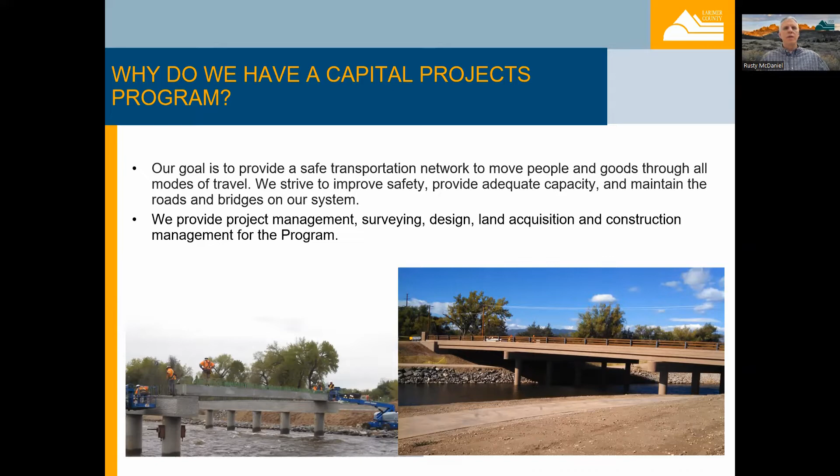The goal of our CIP is relatively simple. We want to provide a safe yet mobile transportation network for all users, including cars, bikes, pedestrians, and other modes of transportation. Our group provides the project management, surveying, design, land acquisition, and construction management for the projects. In choosing projects, we focus on three main areas: safety, capacity, and maintenance.

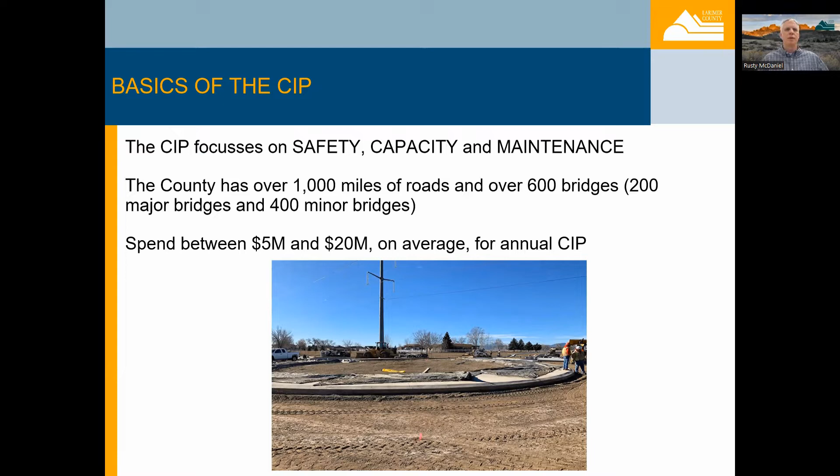We have around $3 million a year for capital projects and another $4 million for the annual overlay project. So depending on grants and other factors, we typically spend somewhere between $5 and $20 million on projects each year. This doesn't go very far when you consider we have over 1,000 miles of roads and 600 bridges to manage.

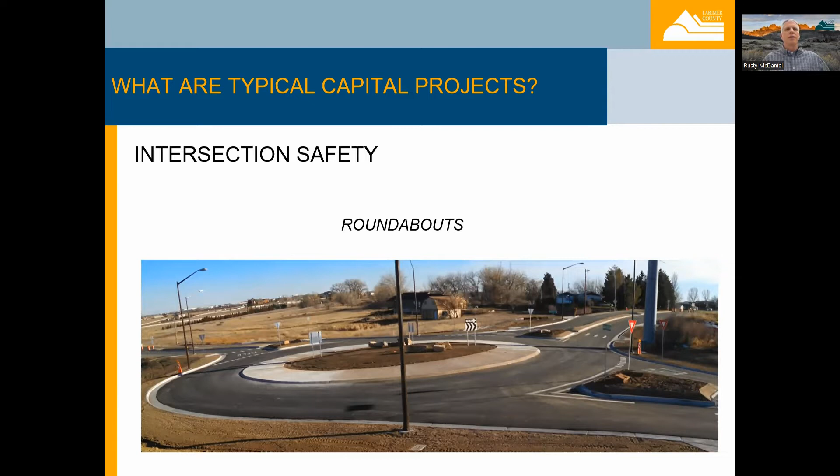Here are a few examples of our projects. Intersection safety is always a high priority, and roundabouts are a great way to improve safety. To date, we've constructed 6 roundabouts, with 2 more slated for 2023. Signals and turn lanes are also common intersection improvements. Here are 2 signals we've constructed recently.

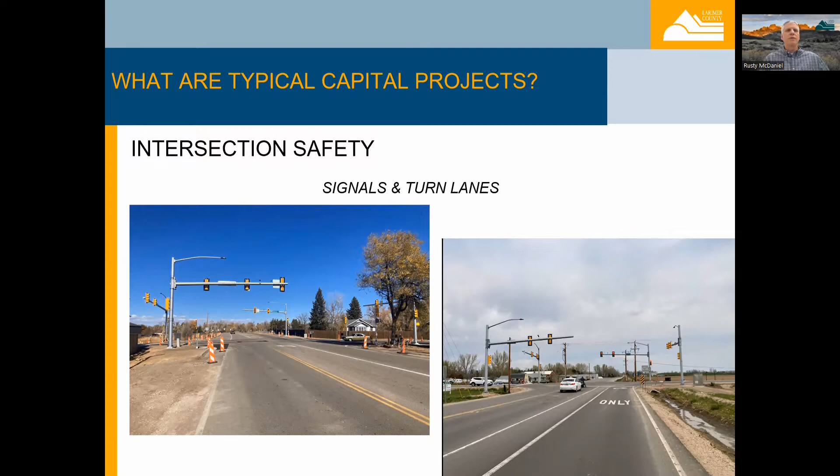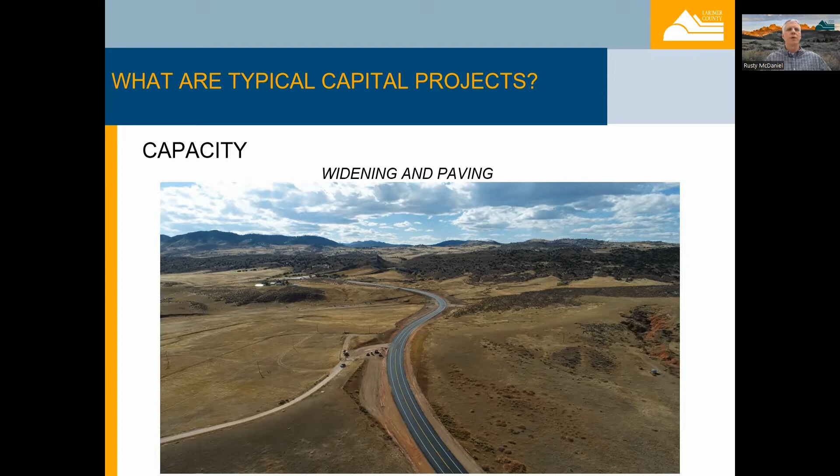In this example, a 3-mile stretch of County Road 72, which is part of the Owl Canyon corridor, was turned from a gravel road to a paved road in 2021, which greatly increases its capacity.

This example of a bridge is one that we recently replaced on the Namaqua Road over the Big Thompson River. Prior to the project, it was a narrow 2-lane bridge. Now the new bridge provides sidewalks as well as on-street bike lanes.

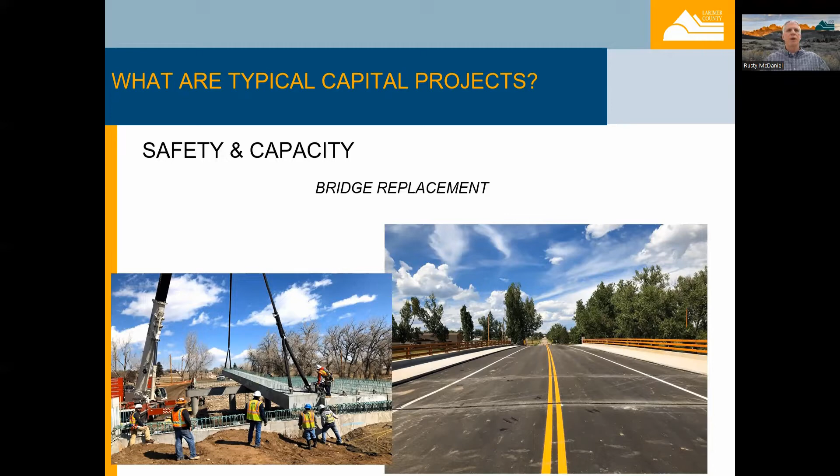It takes a real team effort to choose which projects we should work on. We work closely with our transportation operations group, our bridge program manager, the development review group, our floodplain manager, and our road and bridge department to make our selections.

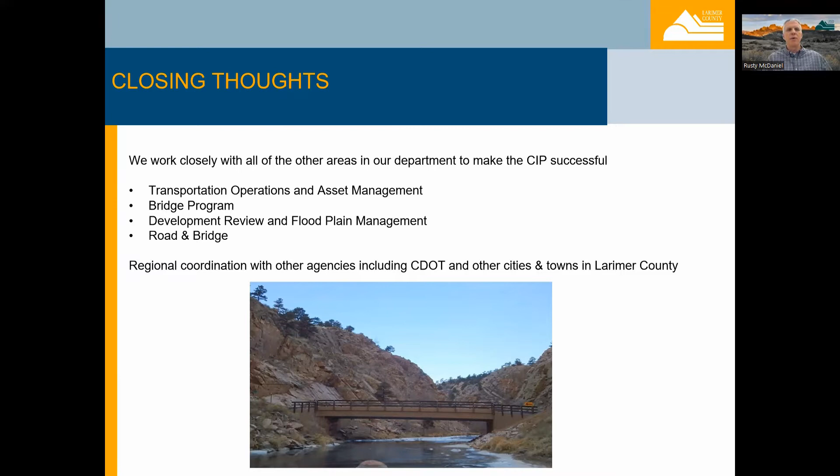And finally, in order to have a successful CIP, we need to work closely with other agencies. CDOT, or the Colorado Department of Transportation, oversees all the projects that we receive federal or state grants for. We also coordinate and sometimes even partner with cities and towns in the county, as well as our neighboring counties, to build projects that will benefit us both.

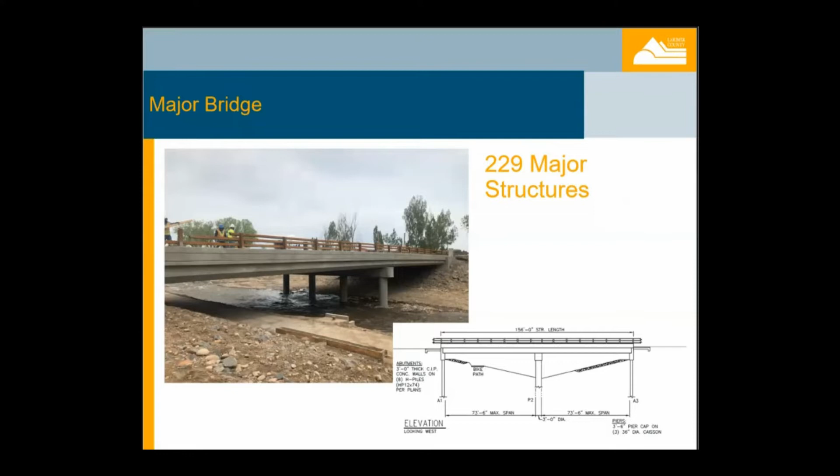Larimer County has three categories of bridges: major, minor, and culverts. A major bridge has a clear span opening greater than 20 feet measured perpendicular to the waterway along the center line of the road. The average age of a Larimer County major bridge is almost 40 years old. The average cost to build a smaller major bridge is about $1.5 million, while some larger capital projects incorporate bridges greater than $3 million.

A minor bridge is any structure between 4 foot and 20 foot in clear span. These can be concrete or steel pipes, concrete box culverts, or small bridges, for example. Larimer County currently has 485 minor bridges, and the average age of a minor bridge is almost 50 years old.

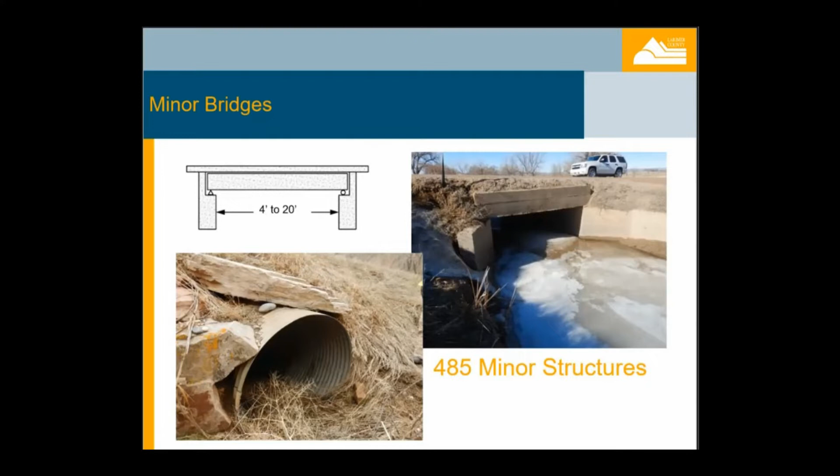Any structure under 4 foot in diameter is captured under our culverts inventory, and there are over 4,400 cross roadway pipes in unincorporated Larimer County.

All major bridges in Larimer County are required to be inspected every 2 years. The information collected during the inspection is reported to the state and National Bridge Inventory. Though the average age of a bridge in Larimer County is over 40 years, the overall average condition of our bridges is actually slightly above the state average.

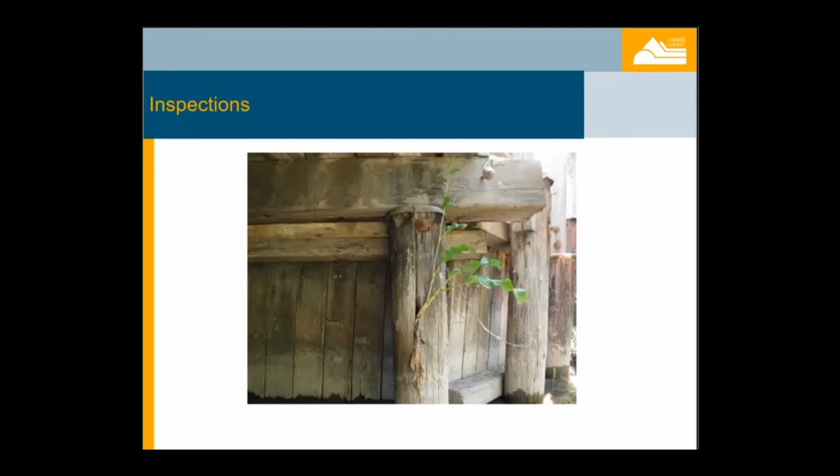In the case of significant or rapid deterioration of a part of a bridge that warrants our immediate attention, inspectors will notify us in a letter called an essential repair letter. This is an example of a timber bridge where one of the timber piles is core rotted and plants are now growing out of it. Though we might consider this a creative installation of hydroponics, we work hard to monitor and correct elements before they become a bigger issue.

Not all repairs are as extreme as the timber pile example. The purpose of repairing or rehabilitating a bridge is to extend the bridge's serviceable life. The more proactive we are in maintaining and repairing our existing inventory, the longer a bridge can stay in service. Larimer County Engineering works with Road and Bridge to program maintenance and repairs of bridges and culverts.

Here's an example of a concrete deck repair. This bridge didn't have any asphalt along the curbs, and after many years of water working its way into the concrete, we identified spalls on the deck. The spalls were chipped out, the steel reinforcement and exposed concrete was sealed and treated, and then the bridge deck was patched. Finally, we paved all the way to the curbs and placed this bridge on a routine deck sweeping program to keep debris from accumulating at the curbs.

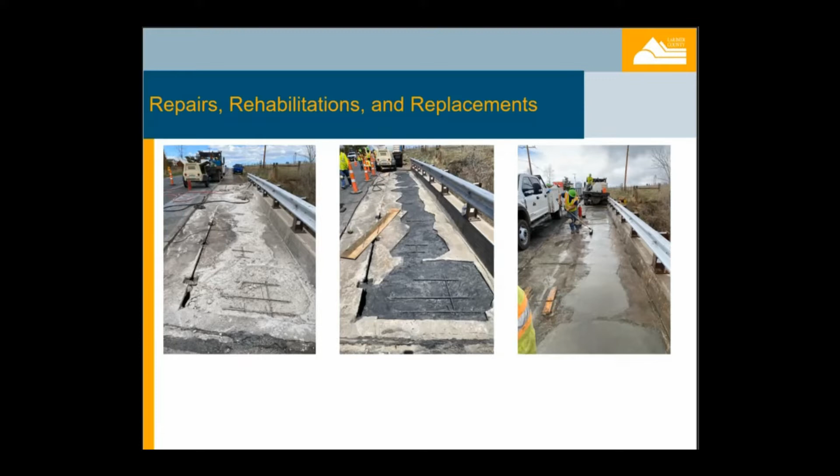Using repair methods like this helps us stretch county taxpayer dollars further and is a great example of adding many more years to the serviceable life of a bridge instead of just replacing them altogether. There are so many parts and pieces to managing Larimer County's bridge program. I hope this has provided you with a quick insight into what we do. Thank you for your time.

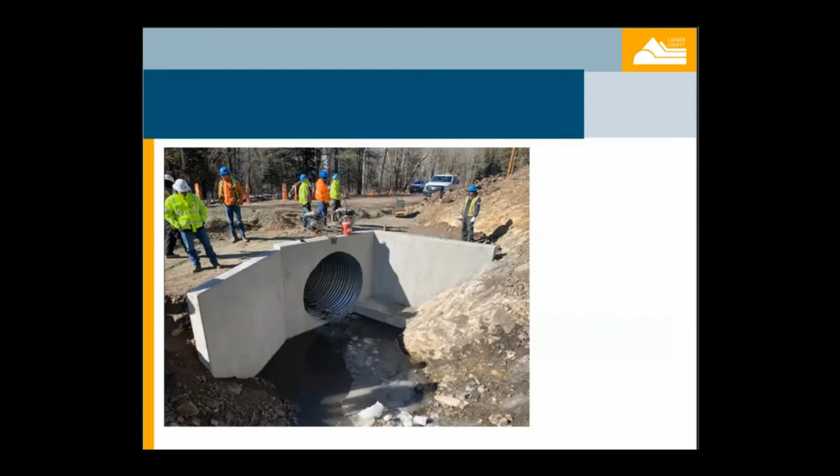Hi there, my name is Matt Johnson, and I'm a project manager for the Larimer County Engineering Department. I'd like to take a few minutes to describe some of the work we do within the department and for the county. Unfortunately, our county has had several major natural disasters to contend with since 2012.

During the summer of 2012, the High Park wildfire burned approximately 90,000 acres in the foothills west of Fort Collins. Significant flooding issues resulted within the burn area afterwards. The engineering department managed multiple mitigation efforts following the fire, such as aerial mulching, replacement and upsizing of stream crossings, such as in Rist Canyon, structure protection, and rock armoring of roadway embankments and slope stabilization projects.

While the county was still in recovery mode from the High Park fire, one year later, significant flooding occurred in September 2013 throughout numerous mountain streams and river corridors. Widespread destruction happened along rivers such as the Big Thompson, Little Thompson, Fish Creek, and Buckhorn Creek. Communities such as Glen Haven, Pinewood Springs, and many others were cut off until roads could be temporarily rebuilt.

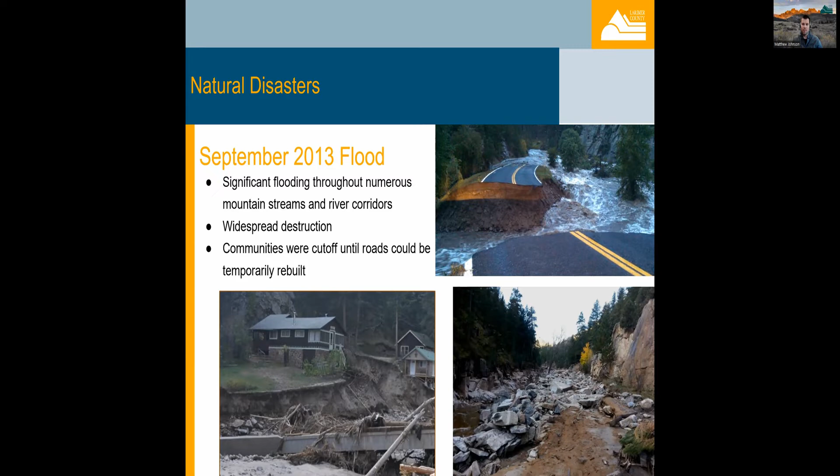The engineering department managed many of the roadway and bridge reconstruction projects in the years following the 2013 flooding. In fact, we are close to completing the final project this summer in 2022, nine years after the event. The county sought public assistance from multiple state and federal agencies to help provide project funding.

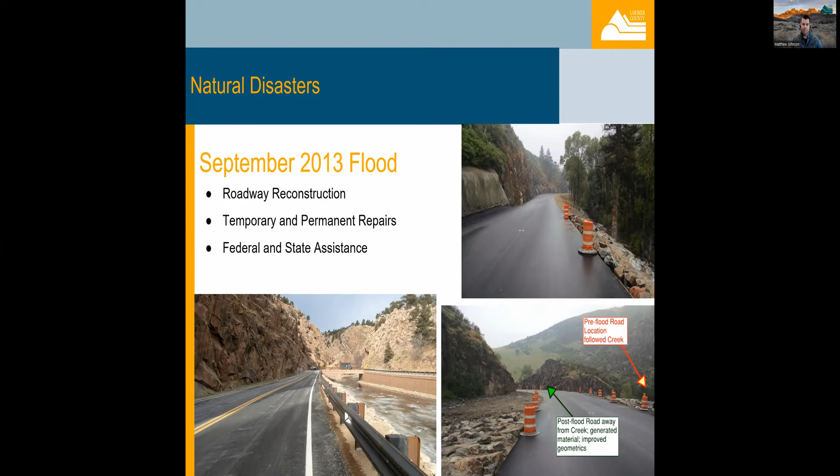Then, in 2020, the Cameron Peak wildfire, the largest in state history, burned approximately 209,000 acres in the western mountains of Larimer County. Similar to the aftermath of the High Park fire, we saw flooding and debris flows caused by relatively routine thunderstorms within various drainages in the Cameron Peak fire burn area.

The engineering department again partnered with state and federal agencies to fund and manage mitigation and recovery projects consisting of road rebuilding in the streamside area of Glen Haven, structure protection, and culvert repairs in the upper Buckhorn, as well as other locations throughout the burn area.

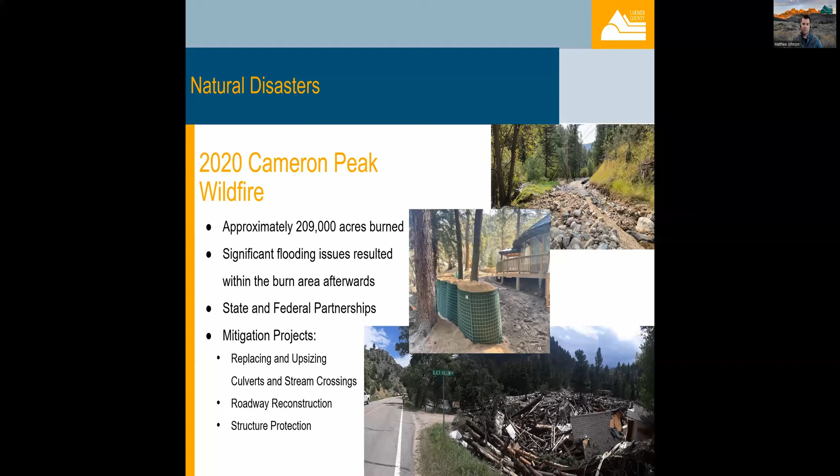I hope this video provides a window into the important and rewarding disaster mitigation and recovery work that the engineering department continues to provide. Thank you for watching.

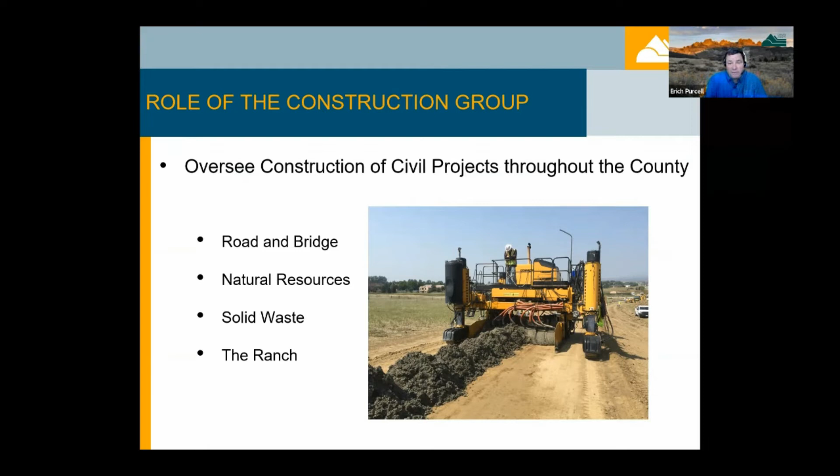After a project has a set of plans and a contractor has been awarded, our group oversees construction in the field. We construct projects for many departments, including road and bridge, natural resources, the landfill, and the fairgrounds. Our group is in the field during construction, orchestrating all the moving parts to deliver projects of the highest quality and with the best value to Larimer County.

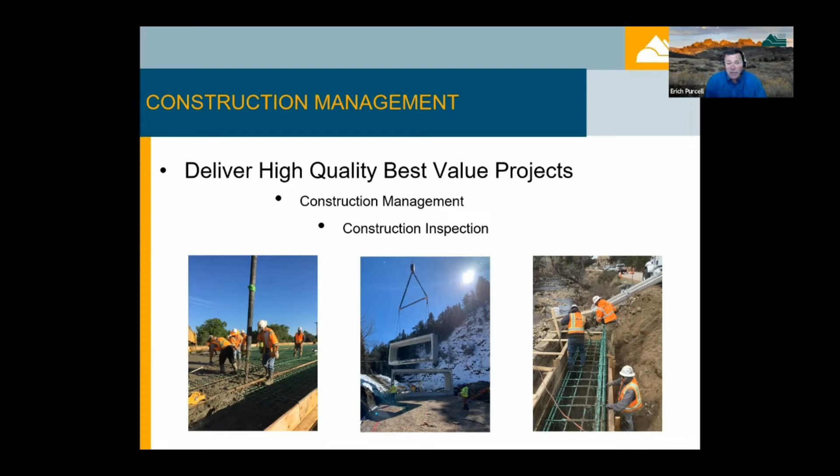Our group is divided into construction managers and construction inspectors. Construction managers oversee the entirety of construction operations. They're focused on the schedule, safety, and contractual details of the project. Our CMs are the hub of communication, ensuring engineering staff, the contractor, and the public are informed and aware at every stage of the project.

This communication keeps the project on schedule, informs the public of potential impacts, and keeps the contractor informed of any design changes. CMs look forward for possible issues meeting deadlines and work with the contractor to complete the work on time, thereby minimizing delays to the public and costs to the county.

Even the best set of plans runs into unforeseen conditions in the field. Our CMs coordinate with their contractors and design staff to develop the most cost-effective and timely solutions to keep the project on schedule and the design intent met.

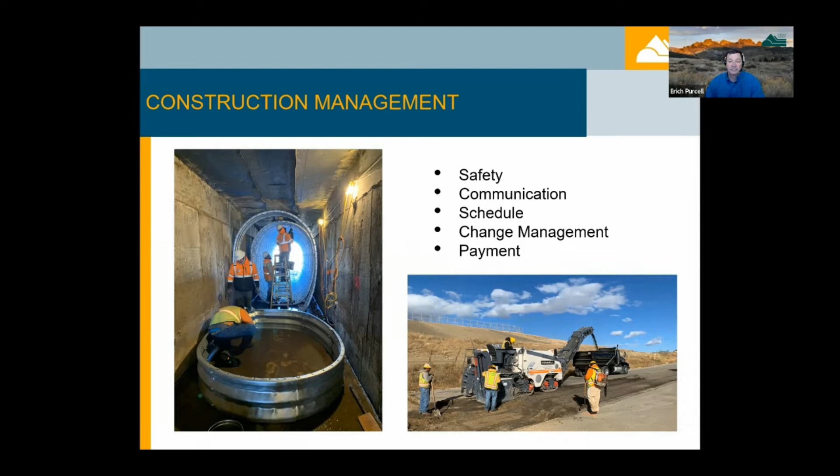Our construction inspectors are boots on the ground. They are on the job site daily, working side by side with the operators and laborers, inspecting for conformance with the plans and specifications. They schedule and review material testing to make sure the end product meets our requirements.

They also keep daily logs of the work performed, so the contractor is paid promptly and the county is only paying for work performed. As the person working closest to the construction, the inspector is also our first line of defense in keeping the job site safe.

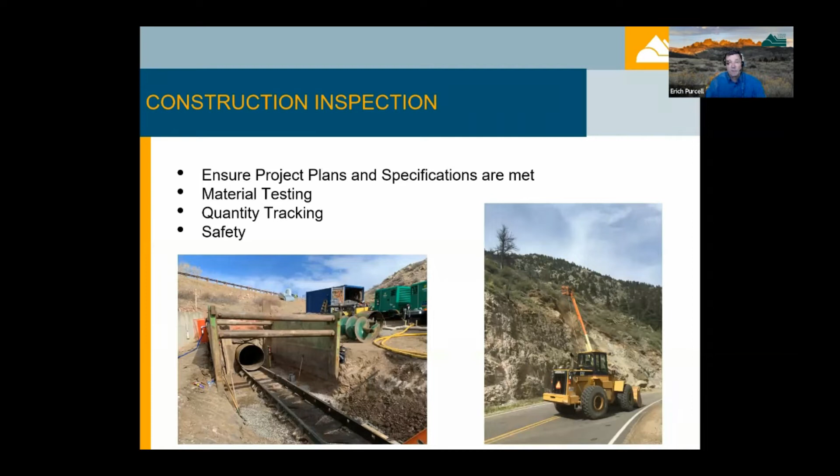As well as construction specifically for Larimer County, our group oversees construction by others within our right-of-way. We issue permits for utility construction with specific requirements and perform inspections so we can ensure our roadways, as well as other utilities, are not negatively impacted by their work.

For new access to county roads, we use the permit process to ensure new subdivision roads or driveways meet our design standards and are constructed to our quality specifications.

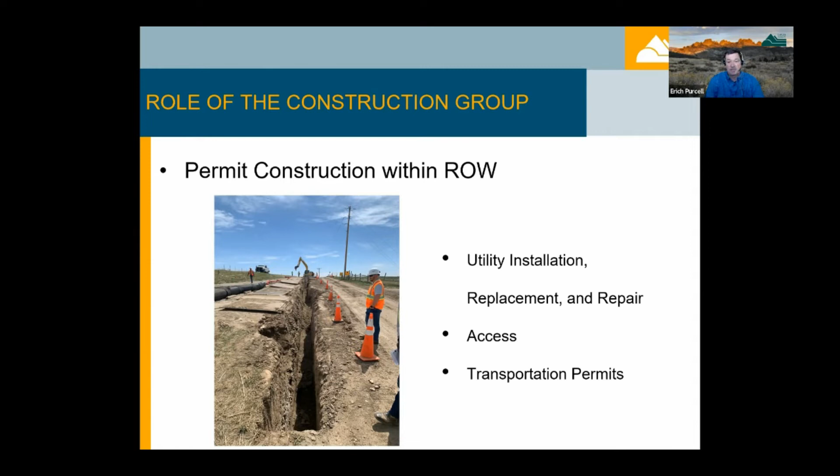Lastly, while not construction, our group also permits special transportation, be it oversized or overweight loads. This allows us to dictate routes that avoid our weight-restricted bridges and minimizes impact to the roadway and traveling public.

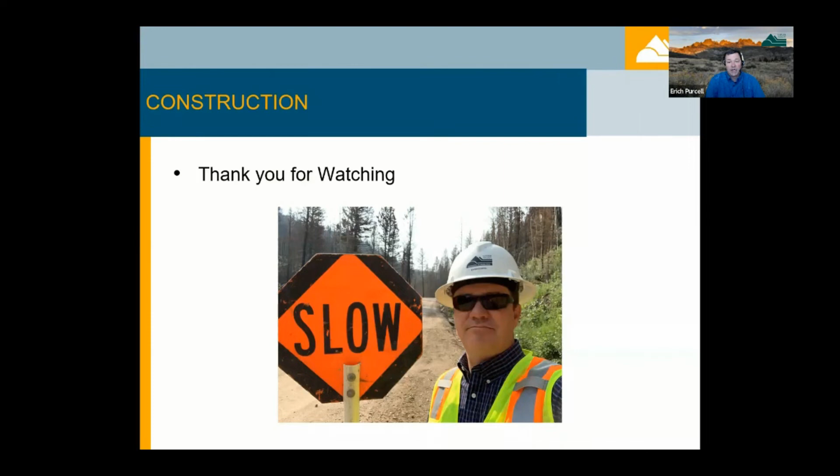There are many more aspects of construction management, but I hope this has provided you with a brief introduction into our role in delivering the roads you drive on, the parks you play in, and the services Larimer County provides. Thank you for your time.

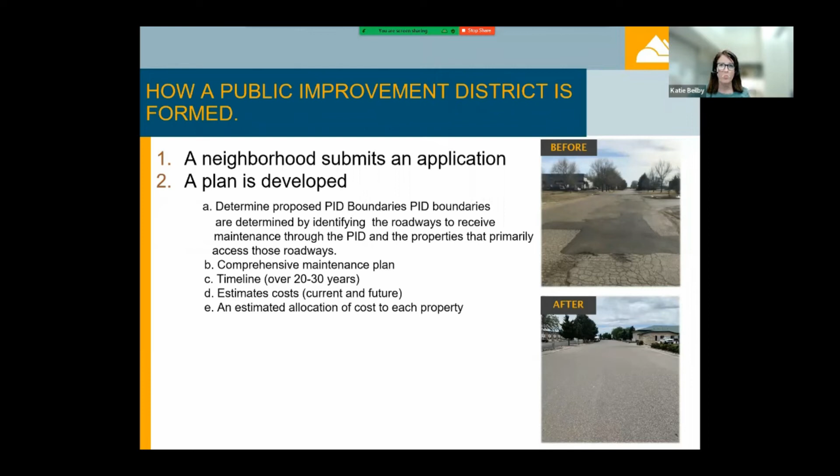If approved, the Board of County Commissioners will appoint members to an advisory board. This advisory board will act as a conduit of information between the neighbors and county staff. All funds collected will then go into an interest-bearing account where staff and the advisory board will begin budgeting for upcoming projects. Annually, the board will hold an owners meeting where neighbors can come and address the board with any issues or concerns they have within their district.

The board will then work with the county on how to allocate their funds. The board will also have the ability to adjust the mill levy rate as long as it never goes above the voter-approved amount.

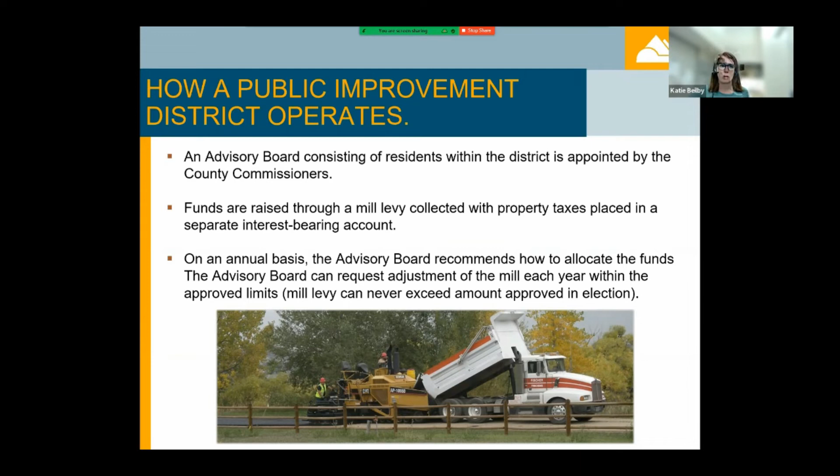Currently, the county has 65 PIDs that encompass over 5,500 properties and 130 miles of road maintenance. Collectively, the PIDs average a revenue of over $3 million a year.

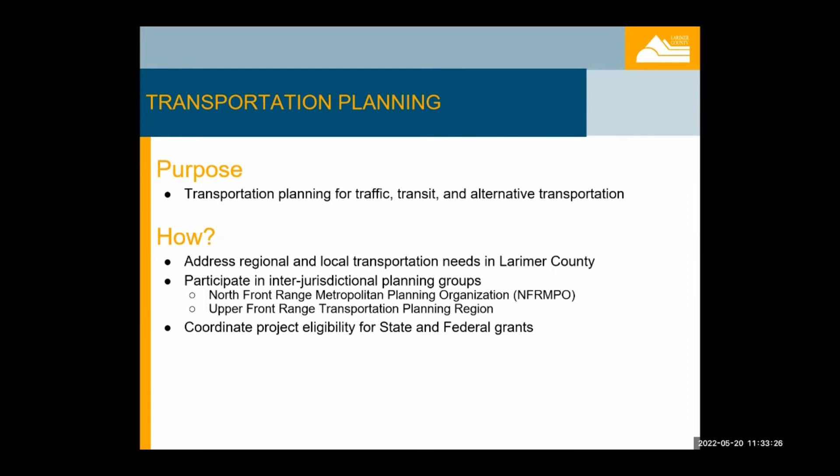Traffic is focused primarily on the operational aspects of traffic in unincorporated Larimer County. Community members are important in helping identify emergent traffic issues. These issues frequently require studies be performed to assess, identify, and prioritize improvements.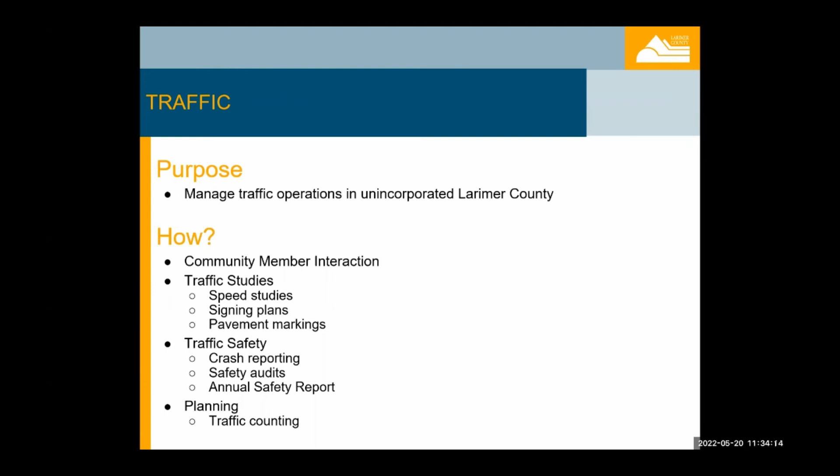Improving traffic safety is a key factor in managing traffic operations. We track crashes on our road system, perform safety audits for high frequency or severe crash locations, and prepare an annual safety report, which helps highlight issues, planned improvements, and performance of past safety projects. Planning for future traffic requires a robust traffic counting program to identify traffic volumes and historic traffic growth trends.

Asset management aims to take care of roadway assets in an efficient and effective manner. Asset management starts with having a comprehensive inventory of roadway assets and their locations. Assets might be physical, such as bridges, roads, signs, and culverts, as well as non-physical items, such as traffic crashes, speed limits, and traffic volumes.

Many of the physical assets are inspected to track their conditions and identify maintenance needs. Assets which receive appropriate maintenance will last longer at a lower total cost than if they are simply replaced when they wear out. Asset management provides the data necessary to help in planning and budgeting to maintain our physical assets.

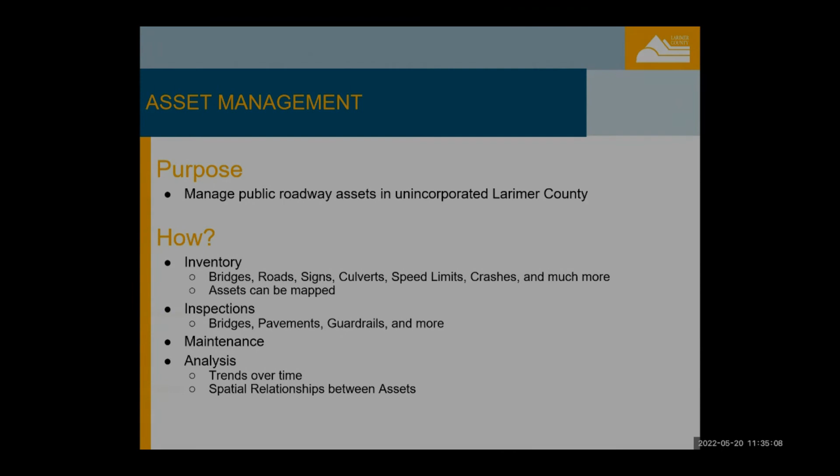Thank you. The Development Review, Floodplain, Stormwater, and Environmental Services team has a wide range of job responsibilities, including performing development review, ensuring environmental compliance, and managing the county's floodplain, stormwater, and MS4 programs. In the following slides, we will share what these services mean.

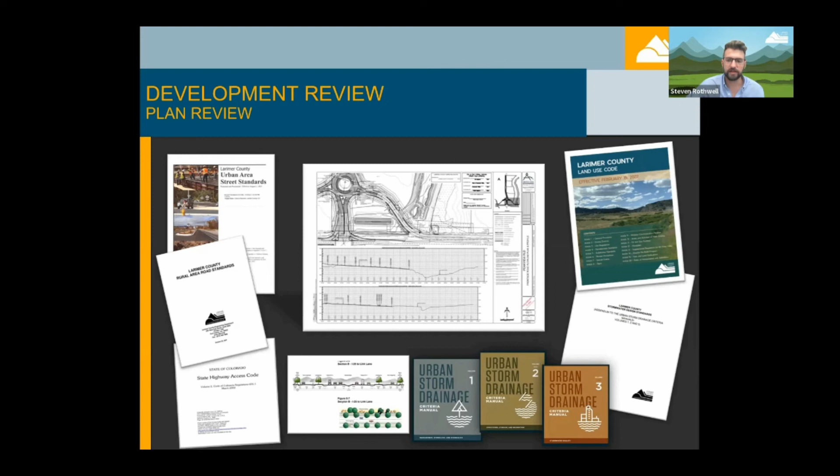As Larimer County continues to develop, our engineering development review team is tasked with ensuring that new development infrastructure is planned, designed, and constructed in a manner that both minimizes impacts to our citizens and environment and safeguards public infrastructure into the future. This involves reviewing development applications for compliance with various engineering-specific local, state, and federal codes, standards, and regulations. The team also works cooperatively with other city and county jurisdictions when reviewing all new land use applications.

Once applications are approved, the team monitors the construction of these developments from the initial groundbreaking through final reclamation. Separate to specific development applications, our development review engineers also provide quality engineering customer service to our citizens, county boards, and commissions. Our projects involve environmental permitting.

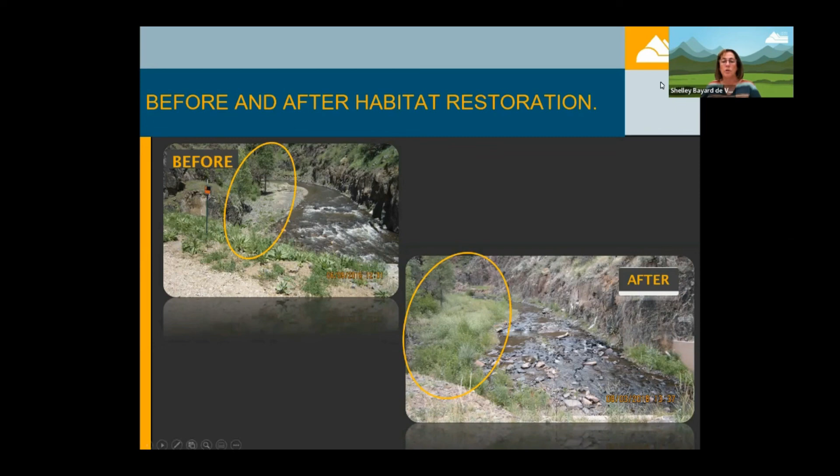For disaster recovery projects, that permitting involves working with FEMA and other state and federal agencies. Environmental permitting ensures we protect our natural resources while we construct our projects and until project sites are fully restored. In some cases, we enhance wildlife habitats for threatened and endangered species, like the Preble's Meadow jumping mouse. And our Environmental and Science Advisory Board provides science-related advice to the Board of County Commissioners and departments and annually recommends the Environmental Stewardship Awards.

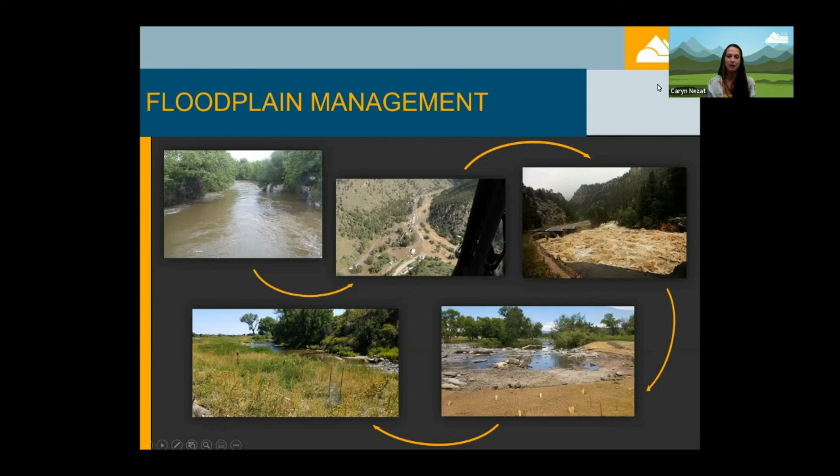Larimer County floodplains are located along the Poudre, Big Thompson, Little Thompson rivers and their tributaries. Floodplain management keeps us compliant with FEMA's National Flood Insurance Program and, most importantly, protects citizens and property from flood events. Our team assists citizens with questions related to general floodplain and stormwater management. Floodplain and stormwater information is available online through our Land Information Locator GIS platform.

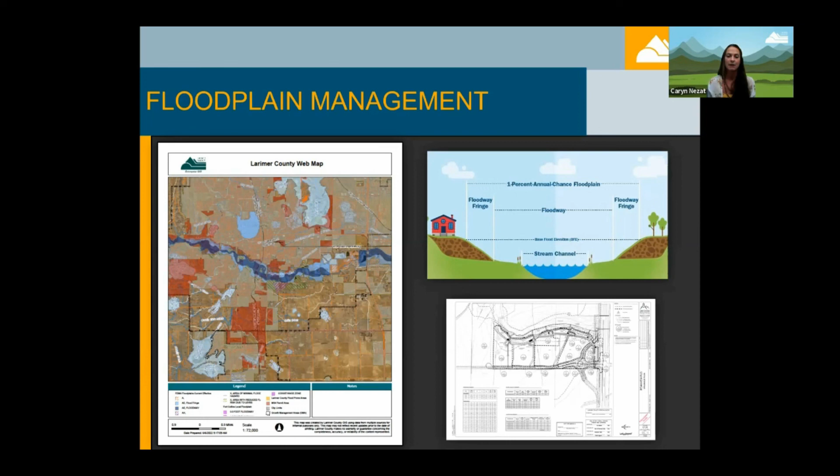Floodplain management includes reviewing development applications, building permits, capital improvement, and river enhancement projects for compliance with federal, state, and county floodplain regulations. This work is supported by technical expertise of our volunteer flood review board.

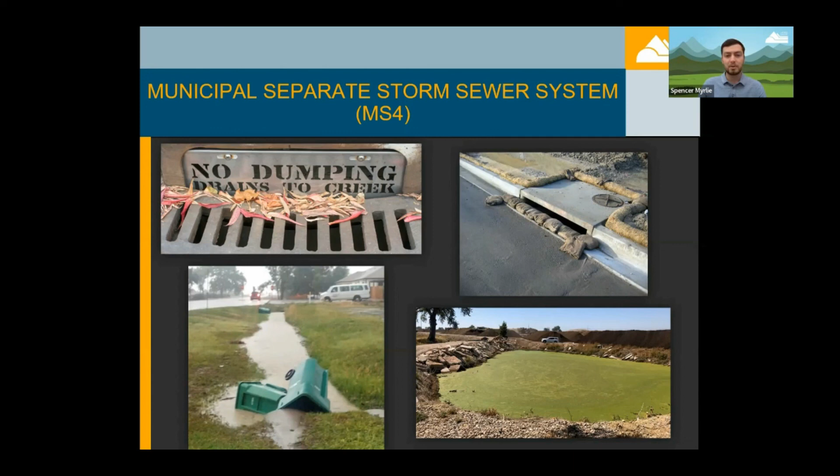Municipal separate storm sewer systems, or MS4s, drain excess stormwater from streets and other developed areas. Along the way, the stormwater can pick up trash, nutrients, sediments, and pollutants, which flow through the storm sewer before it discharges into lakes, rivers, and other water bodies. Pollutants have adverse effects on plants, animals, and people.

To reduce pollutants that enter water bodies, the Colorado Department of Public Health and Environment regulate municipalities through a state permit. This permit requires the county to implement a stormwater program involving these key components.

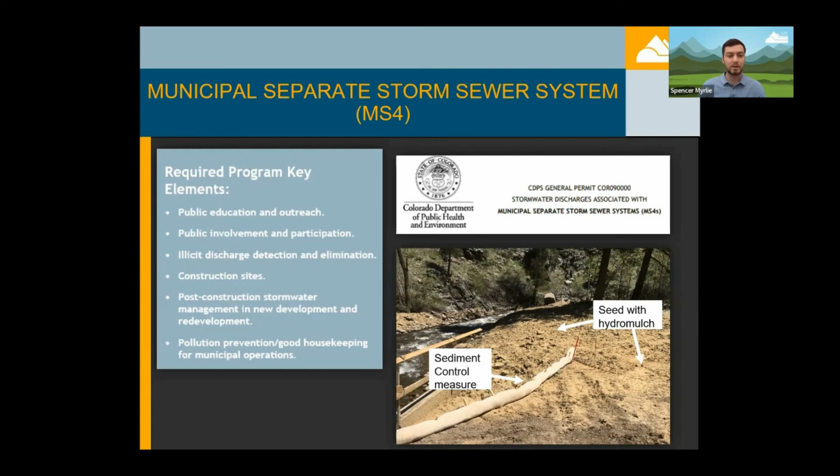Our team is proud to be part of ensuring quality development in the built and natural environment of Larimer County. Thank you.